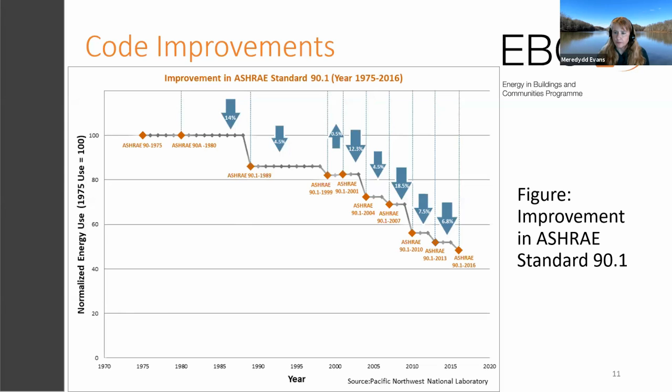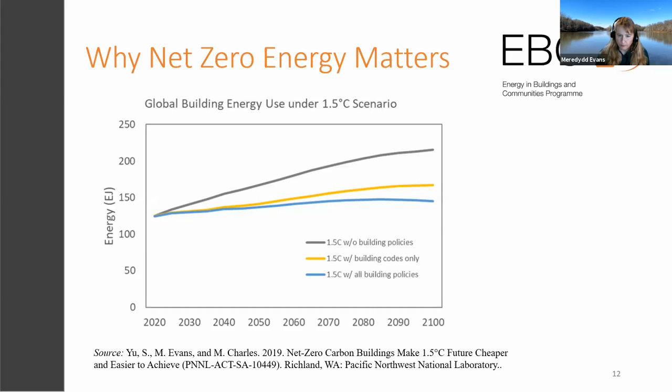Of course, a building energy code only works if you implement it. So compliance best practices are one of the things our working group has spent a good bit of time looking at and trying to share best practices on. Some of the things we note from the different countries that are in the working group and that we've studied include: achieving the potential of codes requires effective implementation systems. It doesn't just happen by magic. You have to figure out your institutional setup, who is going to do the checking, how.

So effective compliance requires adequate resources, technical knowledge, capacity, and strong institutions. And that institutional setup can vary quite a bit across jurisdictions. For example, in some countries, there's a mandatory inspection of all buildings to be able to comply with the code.

Let's see, if folks could mute, that would be great.

Whereas in others, it's more of a sampling type of approach or a review of the documents, but not necessarily all the buildings under construction.

Next slide. Allison, could you mute people?

Training and capacity building is also incredibly important for compliance. People can't comply if they don't understand what they're supposed to do. And so different countries have different approaches, but in general, the range of training programs and the range of support mechanisms has grown substantially.

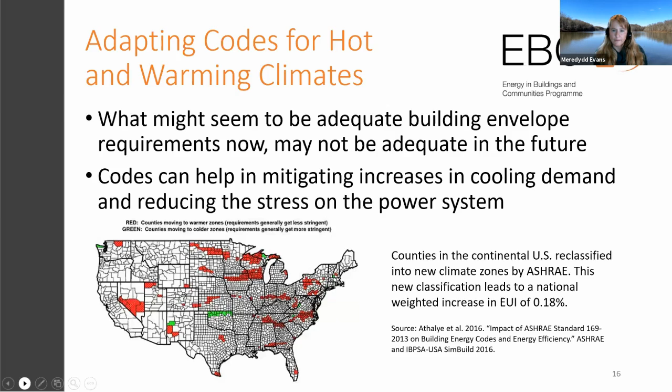Next slide, please. And then integrating new technologies into codes. And this also, I would say, relates to developing codes that can meet extreme weather requirements as well in some ways. So countries around the world are grappling with the best way to integrate new technology into building energy codes. And it's important to take it seriously and carefully think through the implications.

It's not that difficult to calculate what the energy value of adding solar PV onto your roof might be compared to insulation. But at the same time, the building-integrated solar may only last 15 years, where the building might last 60 years. So do you want to have a full trade-off between those two? The same exists with biomass furnaces. In the UK, we've heard they're allowed to install biomass furnaces and have less stringent envelope measures, but those biomass furnaces oftentimes start to break after even 5 years.

So it's a policy question ultimately. And similar things with building lighting, HVAC, controls, and when you bring them into a performance-based assessment, if they don't last as long as the building envelope. At the same time, certainly ASHRAE 90.1 and other codes do have backstops so that you can only trade off a certain amount as one option. But thinking through clearly what those thresholds should be and potentially adjusting them based on data is something that we've seen many countries around the world consider.

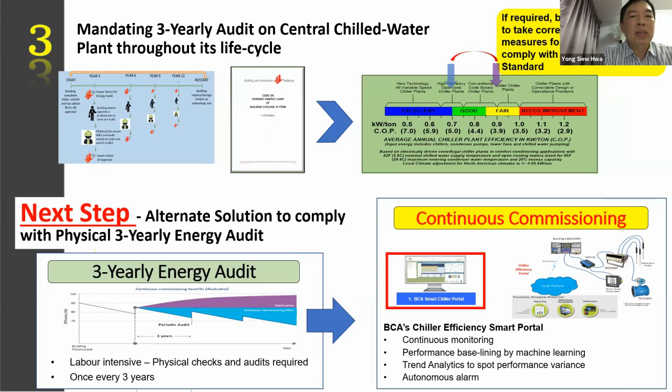Thank you. Very good. Thanks for that. They're very helpful, and I invite several questions we will ask you. Let's hear from Ellen Franconi next. Are you there, Ellen? Yeah, I'm here. Hi. Thanks, David. I'm ready. You can start on my first slide, please. Is it there? There we go.

Yet, as you see in column 3, by going beyond business-as-usual policies and increasing efficiency of AC equipment, we can get back to 2016 levels, and we can further decrease emissions by decarbonizing power. But it's important to think about what else happens when we decarbonize power. We can look at California to gain insights. There's the California duck curve, showing the net load on the grid after renewables for a typical day in the last week in March, from 2012 to a 2020 projection.

As you can see, the renewable energy policies are working. They are removing fossil fuel generation from the grid. But in turn, you can see increasingly steep ramp down and ramp up periods as renewable generation sources come on and off. So this presents some challenges for remaining a stable and resilient grid. But buildings can help, and they have a big role to play. In the US, they consume 70% of electricity generation.

So buildings not only have to have efficient air conditioning equipment, they also have to have demand flexibility, and they have to be interactive with the grid to support its stability and resilience. On the left, I've outlined 7 basic strategies for addressing cooling and other load increases and this need for efficiency, renewables, and demand flexibility. Step 1, it's very important to look at the end use first to reduce the load. For cooling, this means improving the building envelope.

I'm on the other slide, first slide, thank you.

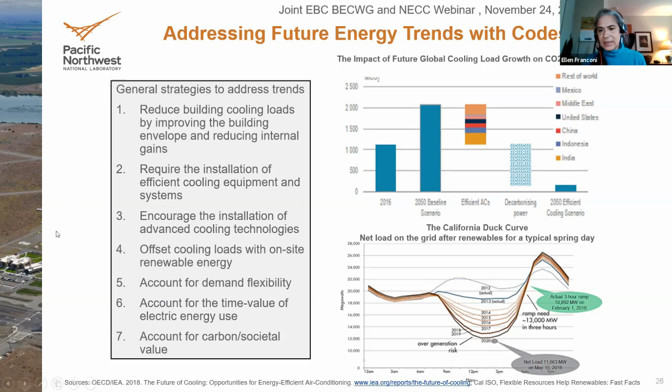Next slide, please. Ooh, the suspense. I'll start talking.

So you can see emerging is a table on the right. What it shows, I cross-reference those 7 steps against typical code mechanisms for demonstrating compliance. And the X's indicate for model energy codes, which is IECC 2018 for residential and ASHRAE 90.1 2019 for commercial, whether that capability can be carried out within current model energy codes.

So you can see that certainly the basics of codes, efficiency, prescriptive requirements, they can take care of driving down energy use. But when we start getting more to renewable energy and the valuing, that's a little bit more challenging, and that is being better addressed for performance-based compliance methods.

And what's interesting about that, when you get to performance-based compliance, you're more able to use your own utility rates. And if those utility rates reflect the grid, then you can start accounting for demand flexibility or the time value of efficiency. And also, as they do in California, have a time-dependent source metric, which can also be used and vary over the year.

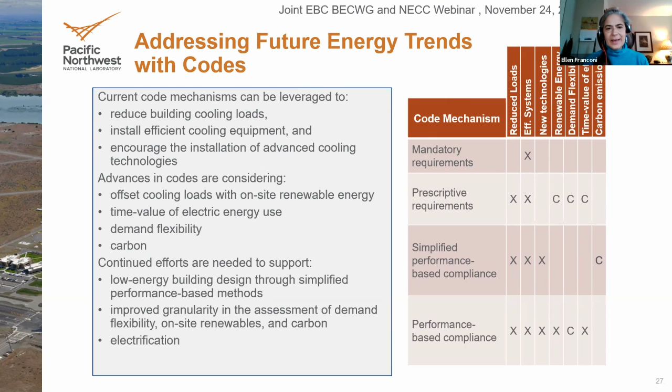Great. Thanks very much, Ellen. Jeremy Williams, do we have questions for Young or for Ellen?

I do, and I think the first question is for Young. It's in regards to M&V and the use of energy audits. And there's a similar question in the chat, and then I had another one that came separately. But the question is essentially why the focus on chiller equipment, and do the audits also take into account other end uses such as lighting or compressed air and ventilation?

Hello. Yep, we've got you now. Okay, actually, why we started with the central chilled water plant is because typically in the tropics, it consumes up to 30% to 40% of the building energy, right? So it makes sense to look at this major energy use system to further save building energy.

We're also mindful that other electrical systems also consume energy, such as the lighting, the lift, and so forth. In our current revision to our code, which we are doing now, next year we'll be mandating some form of sub-metering for the other building energy systems, including lighting, air side system, hot water system, as well as a mechanical ventilation system. I think that our industry has realized the benefit of metering. So we are going to put it into our regulation, likely to introduce next year. Does that answer the questions?

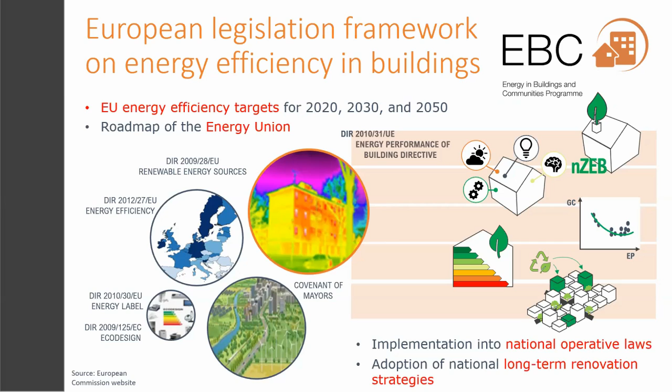Can you skip to the next slide, please?

Basically, the energy performance comes from an energy balance, taking into account delivered energy and exported energy, and energy produced on site from renewable sources. It is, of course, a weighted summation that takes into account primary energy factors. Some key issues arise when analyzing these standards. First of all, the importance of a correct definition of the energy assessment boundary of a building. Then the concepts of delivered energy, on-site produced energy from renewable sources, exported energy.

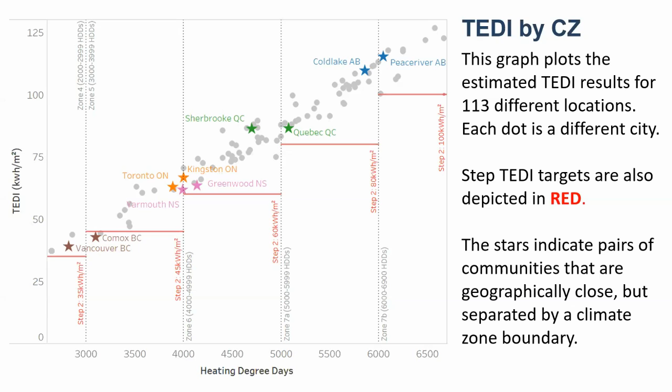Great. Thanks, Alex, for that. And you also underscore a different point, that there were several federal countries on the call today who deal with subnational issues, including yours in the U.S. and Australia, and I don't know if Brazil's on the call, et cetera. So thanks for helping us think that through.

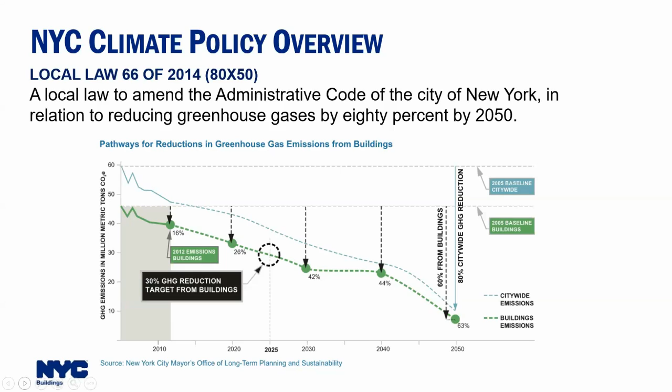And we have about 1.1 million buildings in New York City. So to give you context for the laws that I'm going to be talking about, we are going to be targeting our largest buildings in New York City, those that are 25,000 square feet and greater, and I guess that's about 2,300 or so square meters, with a suite of laws that passed last year. So if we go to the next slide, I'll focus most of my time on the Climate Mobilization Act. And these laws passed last year in April of 2019. And I'll talk about four of the primary pieces of legislation just very quickly.

In New York City, all new roofs now have to have either a green roof or they must have solar panels on the roof. And that mandate does cover some existing buildings, only when they're replacing the roof down to the structure.

Another legislative change was that our benchmarking law evolved into a public disclosure law where energy grades are now displayed in the lobby of large buildings. And again, it's those buildings that are 25,000 square feet or greater. So it's about 40,000 buildings out of the 1.1 million in New York City that now have to disclose their energy performance in the form of a letter grade so that the public can see that whenever they go in and out of the building. So that's helping owners or occupants become much more aware of the performance of the buildings that they live in or work in.

I also need to mention a law that passed that authorized PACE financing, or property assessed clean energy financing, because we are aware that obviously one of the major challenges for owners is being able to pay for upgrades to their buildings. PACE financing authorized long-term, no money down loans that pay back through an owner's property tax bill.